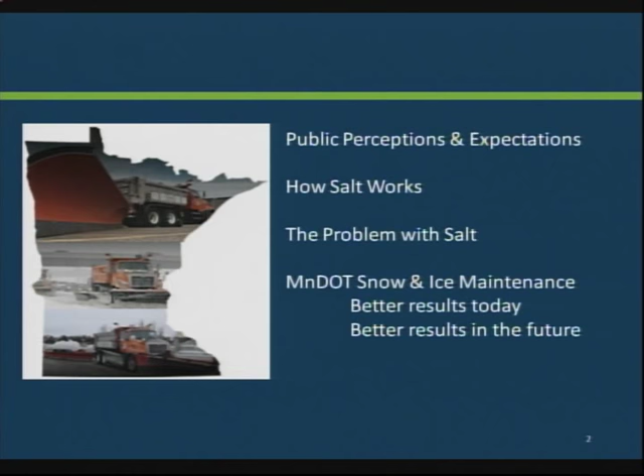So safety, mobility, and environment: we're trying to find a balance between these 3 areas. And some other examples: off the top of your head, how many of you have heard of Towards Zero Deaths? It's another program we have at MnDOT. We've had it since 2003. It was based on a Swedish program, and the idea behind it is to very thoughtfully have an integrated approach to reducing our injuries, crashes, and deaths on the roads.

On the mobility side, that's both our ease of getting around, but also our commerce. And in 2013, the legislature passed legislation for a new program called the Corridors of Commerce. The aim of that program is to alleviate barriers to commerce in areas where there's maybe bottlenecking or other freight issues.

And then on the environment side, we have a number of programs. I come from the Office of Environmental Stewardship, where we have archaeologists and hydrogeologists and vegetation experts. So all of those resources go into all of our projects and programs.

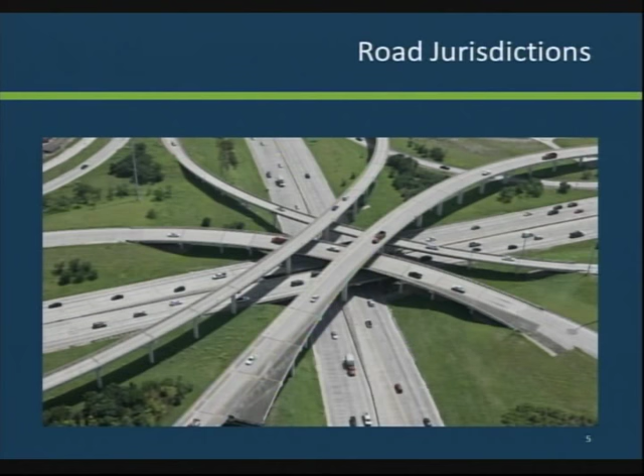And I do hear a lot from counties and cities saying that residents are upset, and it is an area that's not even one of their roads. So there are programs that serve different purposes. And so at the state level, we are servicing higher speed roads. So you're going to have a different plan for an interstate where you're expecting the traffic to be able to drive speeds of 55 to 70 miles an hour, as opposed to the one in front of your house. And we can't have the same expectations in both of those situations.

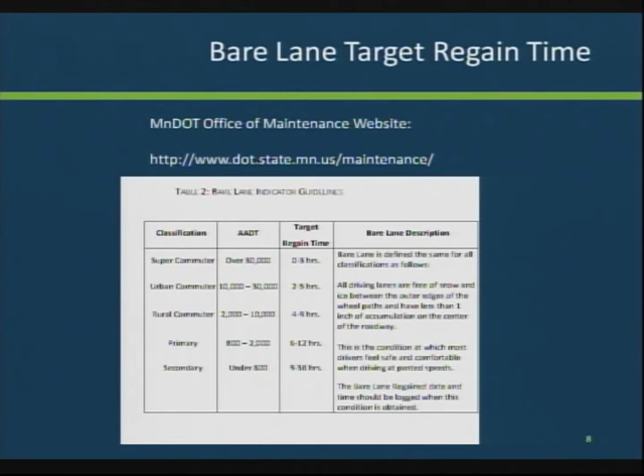And we strive to hit those, but sometimes what happens is we go out and service the road, and those are our targets, but a lot of times the road will recover a lot quicker than those targets. And so that gets into what does the public expect. If we perform and do better, we seem to have raised the expectations on what we're providing, and so it's a challenge to deal with that at times.

Back to you then, Tara. And if anybody has questions while we go on anything, by all means, ask them.

When you first decided to use salt, what was the rationale for doing that? Well, that predates me by a long time. It actually started in the 50s, and I have a chart further on that gets into that a little bit, but it's really with the advent of the interstate and some of the higher volume roadways. It starts fairly low in the 50s, climbed a little bit up to the 70s, and I don't know if it's just because we had more high volume roads or we stopped using studded tires, those kind of things.

There was an increase in the 70s, and then it really was about public safety, and the fleet changes and the cars get faster. It's a lot of conjecture. All that stuff is happening over a long time, and that's kind of the basic thoughts on it anyway. What's the definition of regain time and recovery that you were talking about?

Okay, so the mechanics of how salt works. And this is important to understand because the same reasons that it works so well are also the reasons it's a problem in the environment. We think of it as a melting reaction. We talk about melting the ice, right? But if you think about the cold salt that's thrown out of our trucks or that you throw down on your sidewalk, you're not adding a heat element to it. It's not a heat reaction or a heat transfer. It's actually a chemical reaction that occurs.

So when you have your sodium chloride molecule, and I don't have the picture, when they meet water, the hydrogen bonds in the water create a really strong bond. So the sodium and the chloride separate to form bonds with water. As it comes in contact with more and more water, those sodium and chloride ions pull apart and bond with the water, and they find voids within the ice structure, and keep the water molecules from bonding and forming the crystal structure.

Stepping back just a little bit, it's really important to understand how water freezes. Water seems very common to us, but it's actually a very strange thing from a chemical point of view. Most elements or molecules, as they go into a solid form, actually become more dense. But water is the opposite. It forms a crystal structure that actually takes up more space, and that's why ice can float on water. If it were any other compound, it would sink to the bottom, right? But because it is less dense, it actually floats.

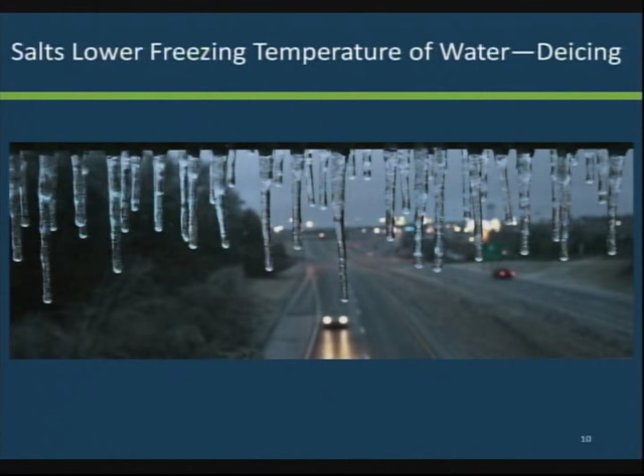So you have this less dense structure that the sodium chloride ions are able to find spaces in, and as they fill in, they keep the water molecules from bonding to each other, and this reaction keeps working until the sodium chloride has basically spent all of its energy. So the reason that works is because the sodium and the chloride can bond very strongly with water. We talk about it lowering the freezing point or being a freeze point suppressant. That's the terminology that we use.

But as I said, the salt has only so much capacity to bond with the water, and past that point, it's used up its capacity. So when we talk about the more the better, that's definitely not the case. And it's not that at 15 degrees it stops working altogether, but it is a lot less efficient and it takes a lot longer for it to work.

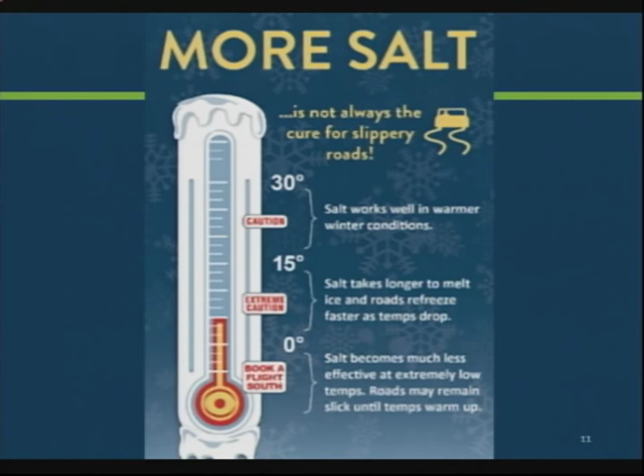You hear a lot, I guess, with different ways to approach the application of salt or sodium chloride. And anti-icing is one of those things that MnDOT does, and I know a lot of other agencies do, which is really you're trying to prevent a bond between the pavement and the snow and ice from forming, or you weaken the bond. And the benefit there is that it's easier to remove mechanically then, so you don't have to put as much effort into removing that and getting rid of that icy surface.

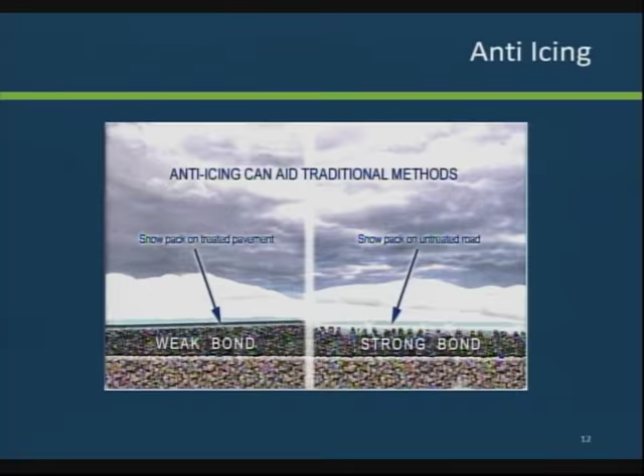It can be very touchy as well, though. When you use a liquid chloride and you're putting it into snow, it will tend to dilute very fast. So it can give you a window of opportunity early on in a storm to get rid of that snow and ice before it gets compacted, but it isn't always the only thing you have to do. So you can anti-ice to prevent that. MnDOT does a lot of anti-icing for bridge decks to prevent frost formation.

So it's just another one of those things we can do, but we hear a lot lately about just using liquids, and really for MnDOT it's just one of several approaches or strategies that we use. And because it's roughly 23% sodium chloride, there's just less chloride in it. So as a practice for the right type of event, it's a good solution and a good practice.

Salt versus sand. I know there's a lot of history with salt versus sand. Again, salt will melt snow and ice when temps are below freezing. And effectiveness, we're saying it's effective for what we're trying to do with it down to about 15 degrees. It'll keep working at lower temps, but it just doesn't work as fast, and so it just loses effectiveness. And it keeps snow workable, so it's easier to remove.

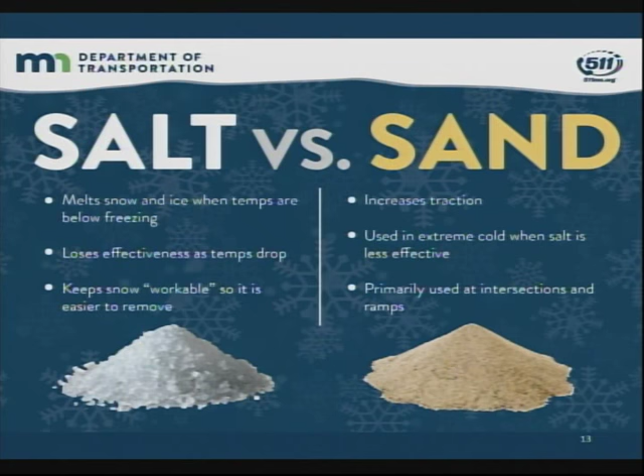Sand, which MnDOT continues to use, even though we have really scaled back on it, primarily for environmental purposes. It increases traction. We use it in extreme cold for traction, and we use it at intersections, ramps, and if we have some problem areas.

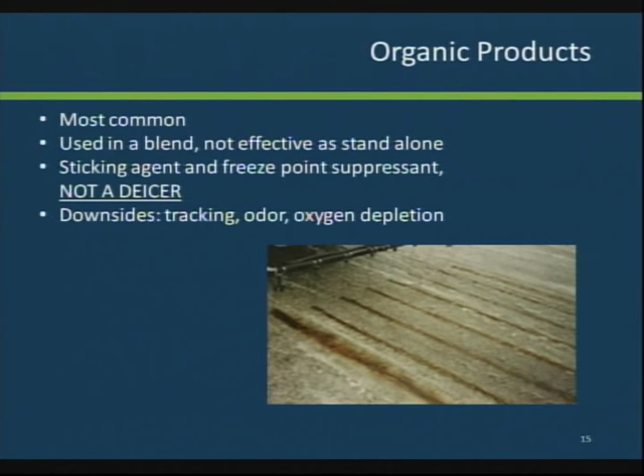Another side effect of organic products is they take oxygen up to degrade. So biological oxygen demand, biochemical demand. Some of the terms are BOD and COD, chemical oxygen demand. And so we're cautious about using too much of those, but we're doing some work looking at some of those as well. So everything isn't always as good as it might be made out to be. So we're just cautious about not getting ourselves into a different situation with organics.

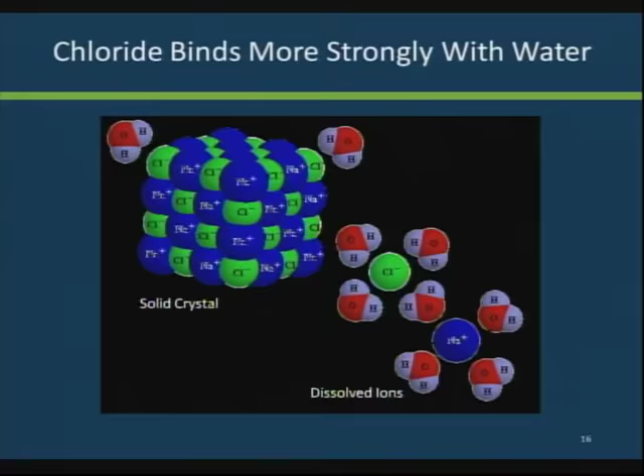And so that's why, from the perspective of maintaining our roads, we have to think about it from a preventative standpoint. Once it's bonded with water, you'll see it's all connected. So whether it's shallow groundwater or going straight to surface waters, it makes its way through. It's either going to infiltrate through the soils to the deeper aquifers, or it's going to make its way in subsurface, eventually out to a surface water.

It also will stick behind. So we're still researching and learning more about how chloride moves through our ecosystems. But we do know that it sticks around a lot. There's not the nice, clean flush that we thought there was. Not that that was a great thing, because was the plan to send it to the Gulf? That's not great for them either. But there has been kind of a denial for a while that the salt gets washed away, so it's not harming our environment. It's not true. It sticks around a lot. It's a lot more persistent than we once thought.

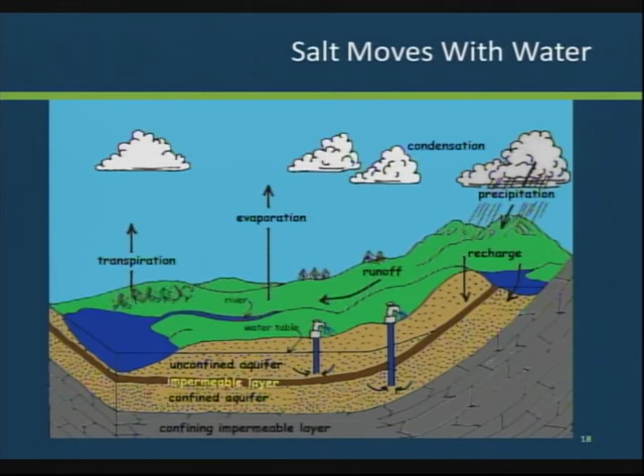And so in the environment, with chlorides, you'll see along roadsides the burn on vegetation. We all have that. Or if you use it at your house, the edge along your sidewalk doesn't look as healthy as it could when spring greens up. It's causing dehydration. Much as if we take in too much salty food, we can feel those same effects. It's the same effect on all living creatures.

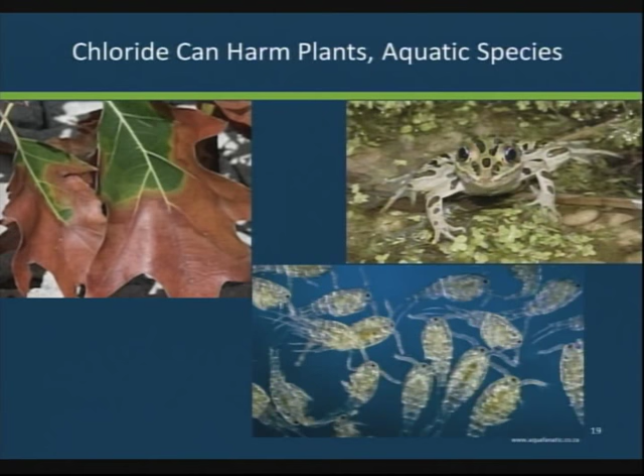But when salt gets into surface waters, it can really affect the zooplankton in particular, which are the beginning of the food web for that whole ecosystem. And amphibians, all of those aquatic species, are really vulnerable as well. And so the toxicity of salt is more about the buildup. And it also depends on where the creatures live. If we're getting a dense layer at the bottom, then the benthic organisms that live at the bottom of the surface waters are more at risk too.

So now we're going to talk a little bit about what we're doing today, what we've been doing, that the public just doesn't know about, right? So part of what we want to communicate is that we've been leading these programs for a long time with the idea that it's really important to use the right material in the right amount in the right place at the right time. And that's been a goal of our maintenance for a long time.

And the map that's shown here doesn't have a whole lot of significance by itself; it's really just to illustrate. We have a lot of different methods that we're using, and for different areas. The northern part of the state gets a lot more extreme cold, whereas the south might see more freezing rain events and that sort of thing.

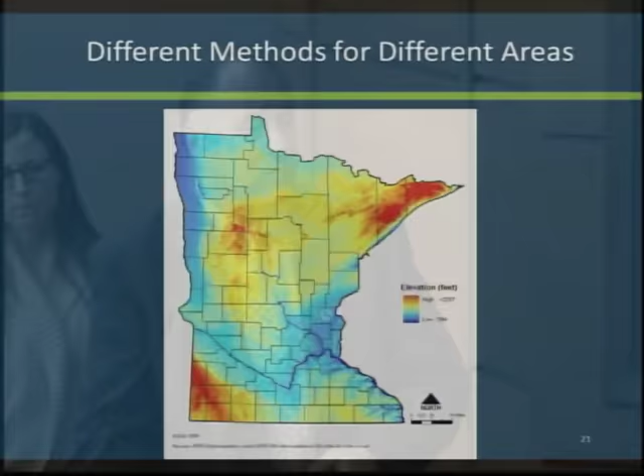And different topography. You have a lot more wind in the southwest, so we have a lot more blowing snow issues there, and forested up in the northeast. So our districts aren't necessarily uniform in all of their equipment and how they're approaching a storm, but the core capabilities are the same.

MnDOT has a lot of primary things that we're using. Road salt in a granular form is our most common de-icing material. We also are using a lot more brine, and that amount is increasing. I think last year we were close to 3 million gallons statewide in brine use. And then the additives.

We're using different organic or chemical additives to enhance the salt, either through pre-treating it before it goes out or blending it with brine. And you see a lot of the trucks will have tanks on them, so it's what we would call onboard pre-wetting. So it's putting that liquid on the solid before it goes on the road.

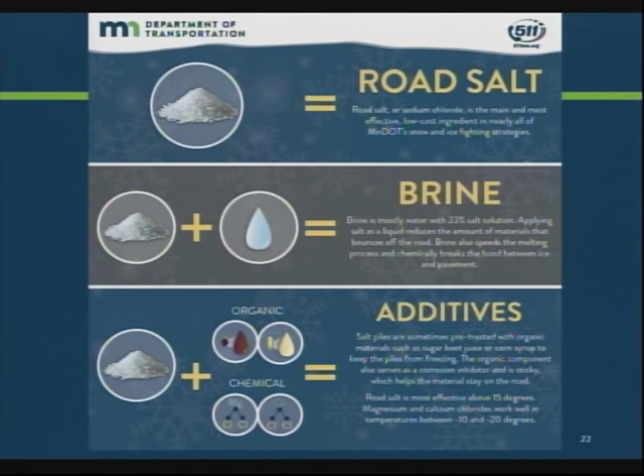And that basically helps control the bounce and scatter so that material stays where we want it. And adding that water activates it, as Tara was saying. So you actually need liquid water for salt to do its de-icing action. So we do a lot of different things.

Some of the materials we're using, again, I mentioned sodium chloride. Some what we call alternatives that traditionally had been in the chloride family, magnesium chloride, calcium chloride. We're using corrosion-inhibited versions of those. We require the ones that we purchase to be corrosion-inhibited.

Potassium acetate and some of the acetate line are getting a lot more interest lately because they don't have chloride. They potentially can be treated, and they break down relatively quickly in the environment. And we're doing some research on that now.

We've traditionally used those for the bridge de-icers, the big automated spray systems in the metro area, and up in our District 1 office in Duluth on some of the bridges there. And so we're looking at maybe expanding some of that into more of our mobile operations. Cost has been a component that has kept us out of that.

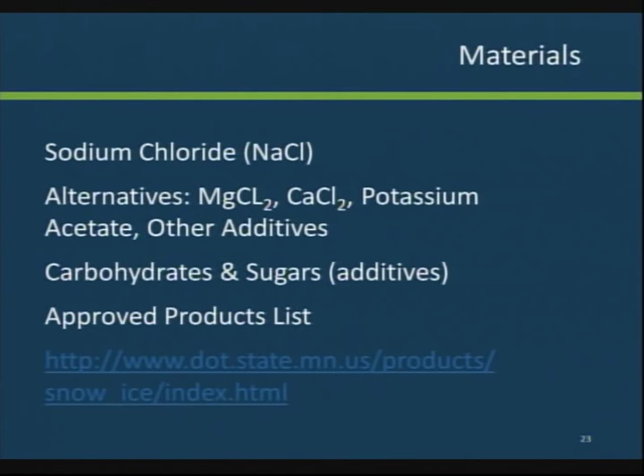So we run all those products through a kind of three-legged process: environmental review for any what I call nasty chemicals or residuals in there, field evaluation, and then our lab will look at it for de-icing capability.

We've been doing training for quite a while. We used to call it our Salt Solutions program, and now it's rolled into what we call our road weather technology program. And we do training for operators we call our snow plow operator training. So every MnDOT plow operator goes through that when they first come on.

For new hires, that's done up at Camp Ripley. We do it every fall, and it covers some key things: basic truck operation, calibration training for all of our sanders. There are different versions; you can do it with something as simple as a bucket at the end of the auger on a truck. And then just understanding what you're using, how the chemicals work, how much to apply, and I'll get into that a little bit more as well.

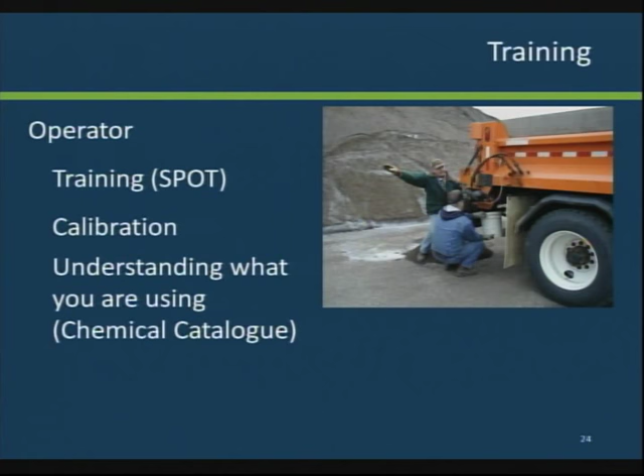And that's a key thing on calibration. You do it at the beginning of the year. If the truck goes in for service, you do it again, because that's a key part of really understanding what you are putting on the road. And MnDOT uses controllers that are tied to our tracking system, so it measures how much is going out as well. But if it's not calibrated right, that is going to give us an error in the calculation.

We have a lot of trucks, what I call mobile systems, essentially trucks, and we do have some of the fixed systems. Some of them are actually roadway. There's some in Duluth on the hills up there, but the ones in the metro are primarily the major bridges, river crossings, 35W over the Mississippi, one by Fort Snelling and some of those.

So they have these automated spray systems, and those are running right now a potassium acetate product. And then we do pre-treating and anti-icing with various different equipment. So everything from tankers to a single axle vehicle here with a tank on it. And so usually you see those are actually just streams of material, of brine going out on the roadway in advance of a storm.

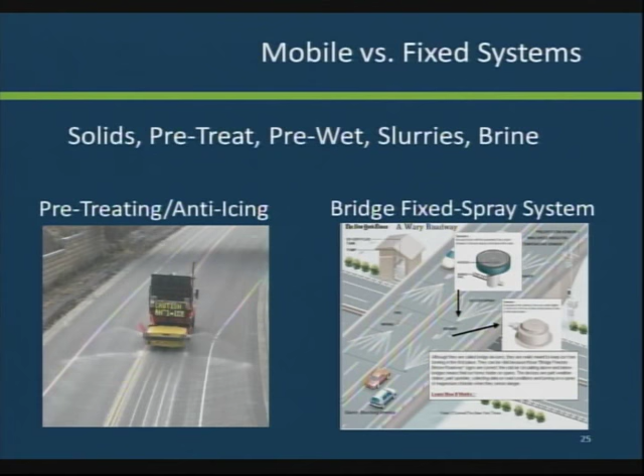So we're doing a lot of work with mechanical type things, and sometimes it's efficiency driven, but tow plows are one of them. You see the one there on the left slide. It's deployed. So if you see something like that, it's not going out of control. That's the way it deploys. It swings out to the side of the truck, and you can actually plow two lanes with one truck instead of just one lane. And that's a chemical hopper on that for chloride.

Something somewhat recent on the bottom portion is what's called an icebreaker, and it's basically carbide fingers on a drum, and you need about 1 inch of ice for that to work without impacting your pavement, but it basically allows you to break up that ice and remove it mechanically instead of using a chemical. These are strategically deployed around the state, and so if an area gets hit, we can mobilize those to different areas.

And our road weather information system, we have a maintenance decision support system, or MDSS, that's been in place for a few years and it's still under development. So we're trying to use technology and information to help our operators make good decisions.

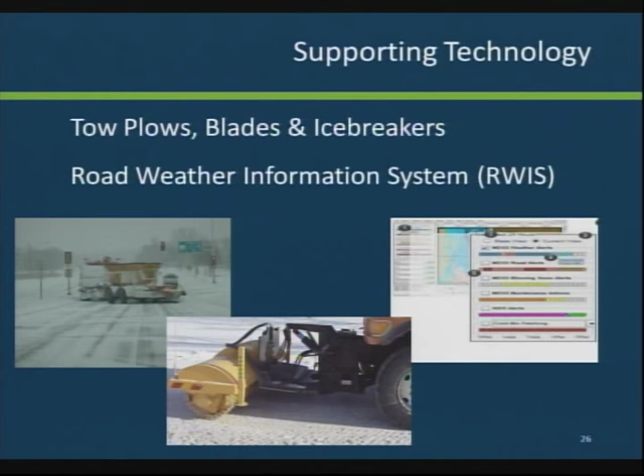Like I said, brine production, this is just an example, some photos of a facility in Rochester. The brine generation tank is on the bottom in the yellow. Pretty simple. You just run water through sodium chloride rock salt, and it generates the brine, and the control systems, when you get to the right concentration, stop running the water through and pipe it off into different tanks. Some of our districts have capability to do custom blends, and the systems are more complex. And Metro has some of the state-of-the-art ones as well. They're usually at strategic locations, and then the brine is shipped around to different places.

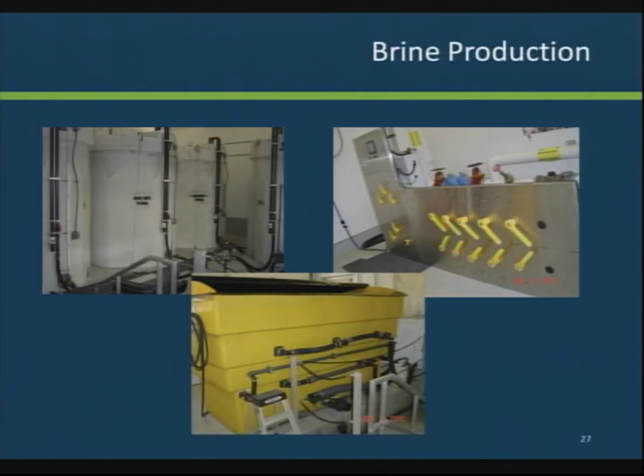I mentioned the MDSS technology in the trucks. They're getting a lot more complex. As you look at it, there's joysticks and computer screens. MnDOT has been involved with technology deployment for over 15 years. We started off with road weather information systems, which is just roadside information. What's your pavement temperature? What's the wind doing? More atmospheric. And then we started putting pavement temperature sensors in our trucks, because that's the key for our operators: what's the pavement temp? What is it forecast to do?

And now we're getting into what's called maintenance decision support, where that information is fed back to the forecaster. They actually give us custom forecasts by route for that operator and send it back to the operator. So you have the forecast, but it's now also giving us a recommendation on the application rate. It knows what type of material they have at their disposal, and it uses the information the driver is sending on road conditions, giving them a real-time application rate for that storm.

So we've been lucky that we've been partnering with the Federal Highway Administration on development of a lot of this, so we've been able to get ahead of maybe other states on this, really leveraging that federal money to help us out.

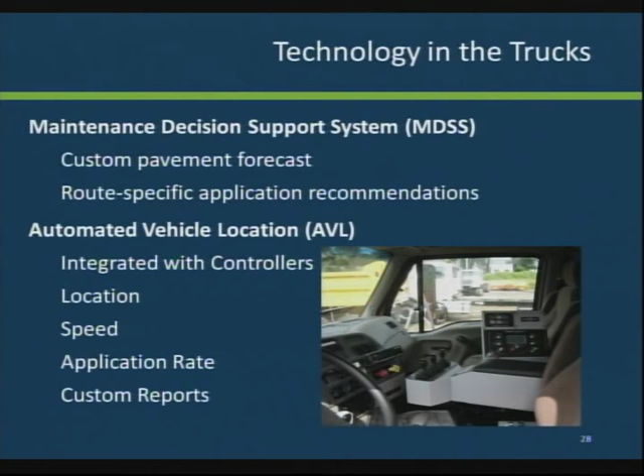And tied into some of that, if you go onto our 511 site, we're actually feeding camera views of plow trucks out on the public domain now too. They're very popular, but only maybe 25% of the trucks have those in them. So they're not all the trucks.

That's back to you, Tara. All right. Yeah, I think we might be jumping back and forth on these last couple slides, so we'll see.

Okay, so Bob already spoke to some of the things that we've been doing all along. We're continuing to improve on those, our training and calibration, all the different types of technology. Like I said, they've been doing AVL, the vehicle locators, for a long time. The MDSS is newer, but it's such a powerful technology that it's getting better and better as we go. We're able to start using some of that data to figure out how we can improve other parts of our program as well.

And another thing that's fun to talk about is we also look at the roadway design. So where are the tough spots out there? Where are accidents occurring, or where could they potentially be occurring? And the snow trap identification and reduction program is also really great. I'm going to speak about that in a second. And then I'll talk a little bit about the research going on.

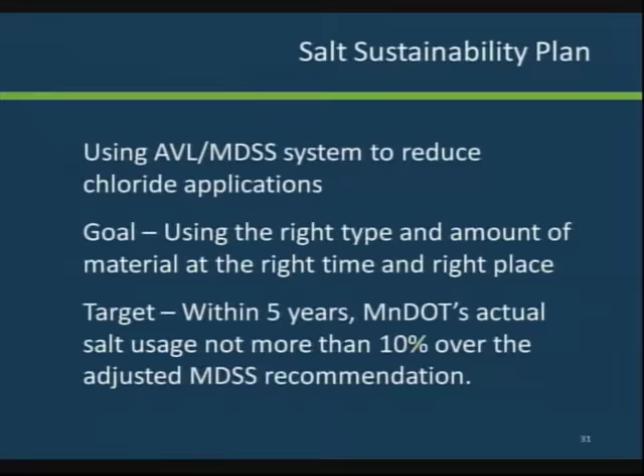Tons of salt per season then? Yeah, it would be individual. It would be based on that roadway. The recommendations are for each route. So basically, every truck is assigned a route, and so it would be for that route, and for those given series of storms, we're not over that recommendation by more than 10%.

So setting a flat percentage sounds easy, but every storm is different and there's no way that you can really just say I want you to reduce X amount. So this was our way of trying to take that into account, as well as using the technology to help us measure where we're at. Did that answer your question? It's about avoiding waste over what's recommended for that roadway. Yeah, whether it's waste or overuse, and again, we're looking at the environmental as well as the cost of that material. And the sustainability isn't necessarily about cost; it's about environment.

So, long term. And the MDSS is kind of complicated, but the idea is it's equipment gathering all that information, pulling it in, and giving the driver a recommendation: given all of the pavement temperature, the wind speed, all of these factors, here's what the computer recommends to put down.

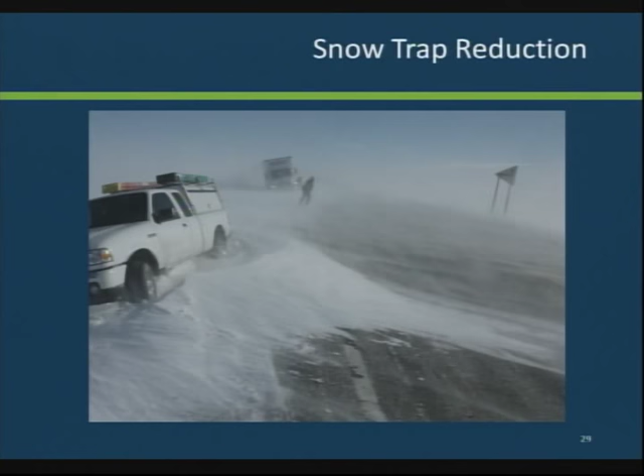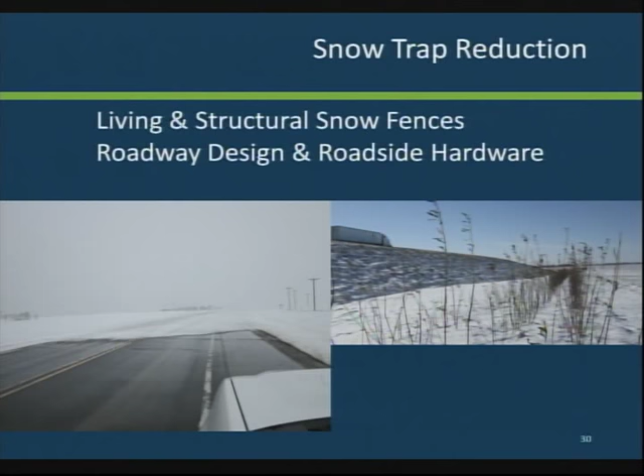So, snow trap reduction: we're basically mapping around the state where we're seeing these areas of blowing snow. You don't want to be putting salt down when you have blowing snow conditions, because then you get what's called black ice. So we basically made the condition worse by putting salt down. So we're mapping where those are, and that's where living snow fences and also structural snow fences come into play. We have great success with that, and we're trying to now figure out where to target that program best, instead of just where do we have a farmer who's willing to join. So where to target those efforts.

There's also a lot of research being done by MnDOT, but also with locals. So the LRRB, the Local Road Research Board, is a great example. They do a lot of research, and Shoreview's participated in this as well, and we're partners on those technical advisory committees. We're a member, but we're also, I guess, considered the host DOT for a Clear Roads group, which is a pooled fund group amongst DOTs around the nation. And so there's a lot of work being done related to snow and ice maintenance and salt through this group as well.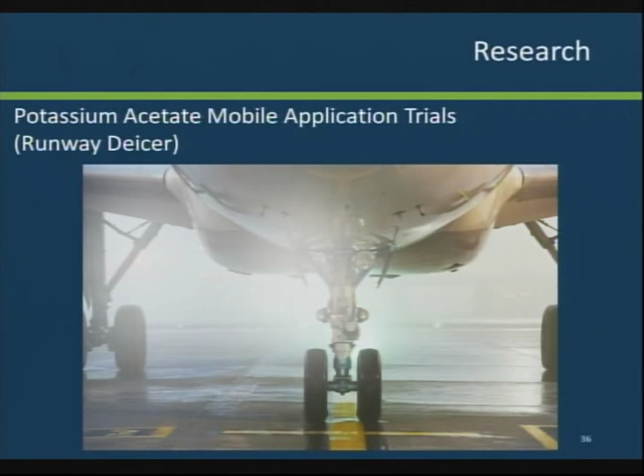And then we are continuing to test new products. One of the ones that Bob mentioned, we use potassium acetate on fixed systems on bridges right now, but we're exploring the idea of putting it in trucks up in the Duluth area this season and seeing how that works.

And then I want to mention, like at the beginning, how I mentioned jurisdictions. It's important to understand that there's not going to be one silver bullet as we reduce salt, and a lot of it is the type of roadway, what the best alternatives will be. And so there's a lot of great research being done right here with the Ramsey Washington Watershed District with permeable pavement and permeable pavers. Those could be great options for certain areas, possibly lower speed roads, parking lots, those kinds of things. So there's going to be a lot of different options depending on the area.

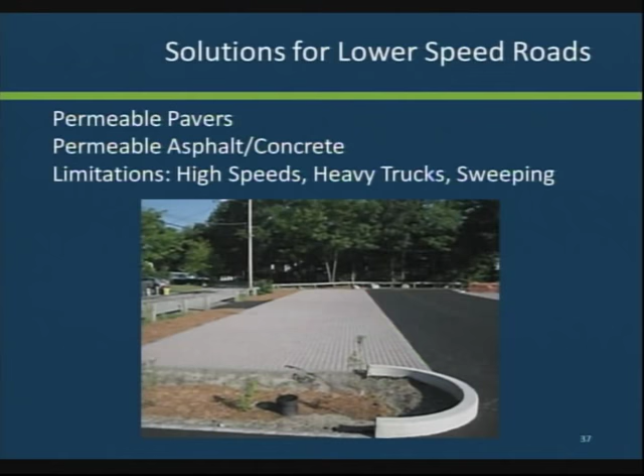And then one thing that I wanted to mention, this is more of an adaptation. We've started to implement salt tolerant sod, and that is really important because erosion is another thing that you're concerned about. There are chlorides building up, and so we can reduce some of the impact by keeping those roadsides vegetated. So we need to come at it from a lot of different angles.

So with that, are there any further questions? I know we're almost out of time here. Yes.

My understanding is that Brownie Lake in Minneapolis is essentially dead because of the salt that's run off of 394 into it. It no longer turns over. The bottom is anaerobic. That's going to continue to happen with more and more lakes. Is MnDOT doing any research toward ultimately eliminating the use of salt, or do you just think the public will be accepting of dead lakes?

So from my limnology background, I can tell you that Brownie isn't a great example just because it's more of a crevasse. It actually has been studied for decades, and it hasn't turned over for other reasons not related to the salt. But you are right, there is a saline bottom layer, but it's questionable that the salt had anything to do with that.